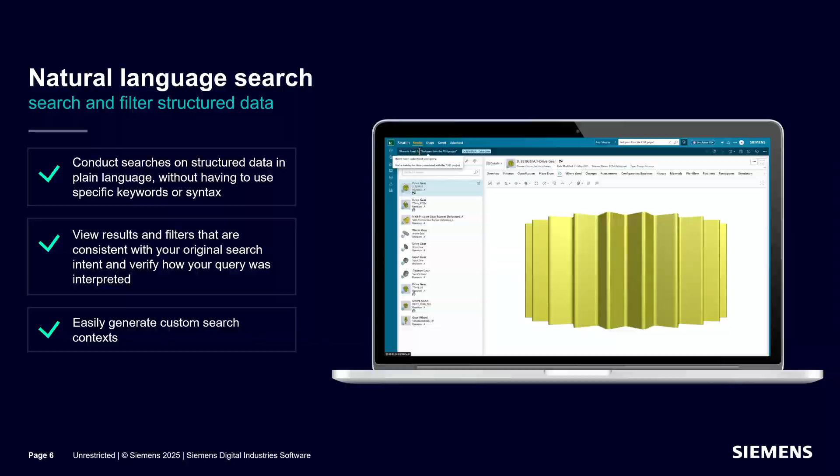We'll now go through the life cycle of a project that could be a product-oriented life cycle, or it could be a plant-oriented life cycle. And every project starts with project definition, and a nice and good project definition starts with reuse. You don't start from scratch, from the white blank. You start by reusing what you have.

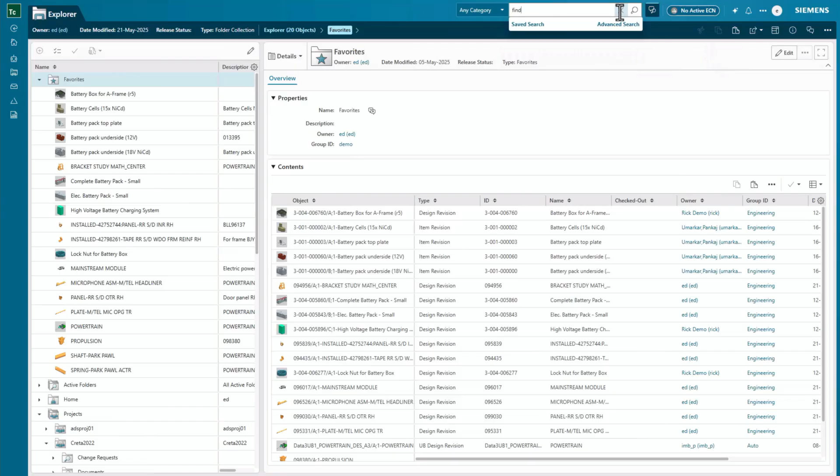And for a nice and good reuse process, information search and access is key. I wanted here to highlight one of the AI use cases we have, about how I talk in natural language to my engineering data backbone to search for information without knowing really what I'm looking for. And I can access all information, including the 3D.

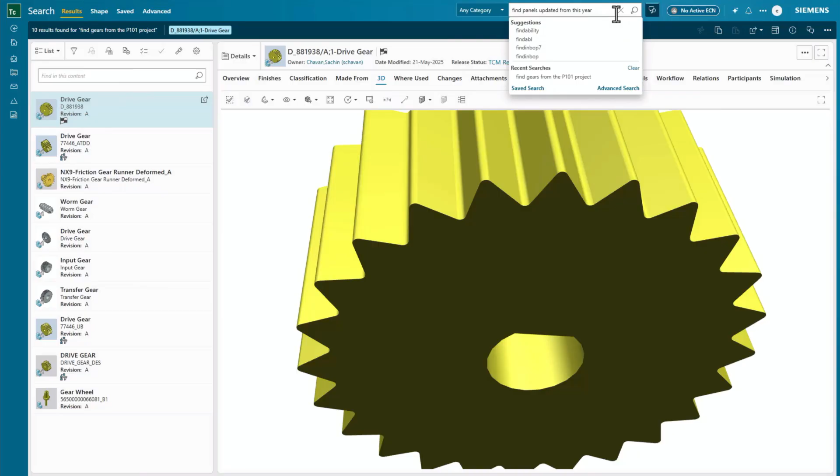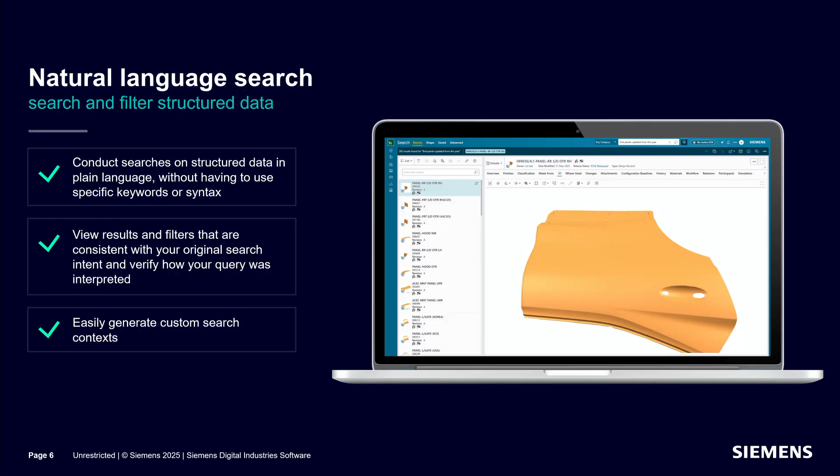But here, in that example, I knew the number of the project. It was project P101. But here, I don't know the code name. And I just ask for the panels updated this year. And so the intelligence knows where to find the panels done this year.

Then in the project lifecycle, you will start, after reusing what you can, to define a system approach, a system engineering workflow, starting with requirements. So we are providing tools to digitalize and move from a document-centric to a data-centric approach for requirement management using one unique agile platform, which is Polarion.

That platform is strongly integrated with an MBSE approach, including an MBSE modeling tool, to have that complete definition of a system and subsystem and provide you the basis of the traceability and the digital continuity through the design and the simulation.

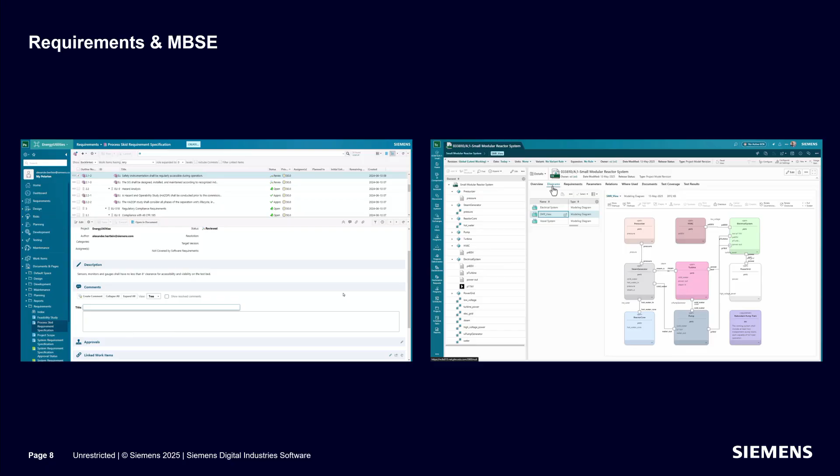The interesting part in becoming data-centric from document-centric is to put AI in your requirement activity. And here you can see that embedded in the tool, you will have capability to validate that a requirement is precise enough.

And it performs a similarity analysis to check with the other requirements that there is nothing too similar, and then a consistency checker to check if you didn't write something which is the opposite in the same document, to help you have a consistent and comprehensive requirement engineering process.

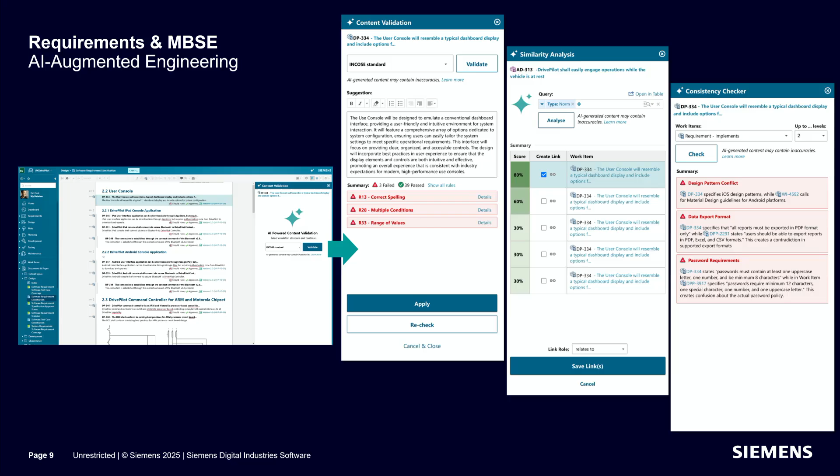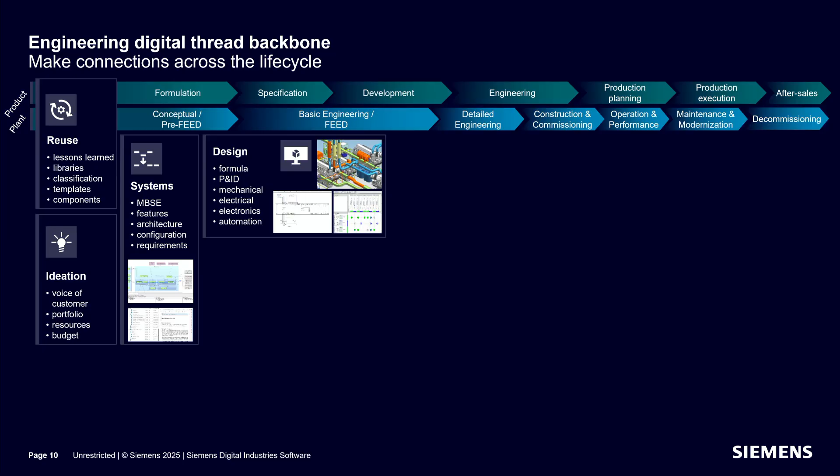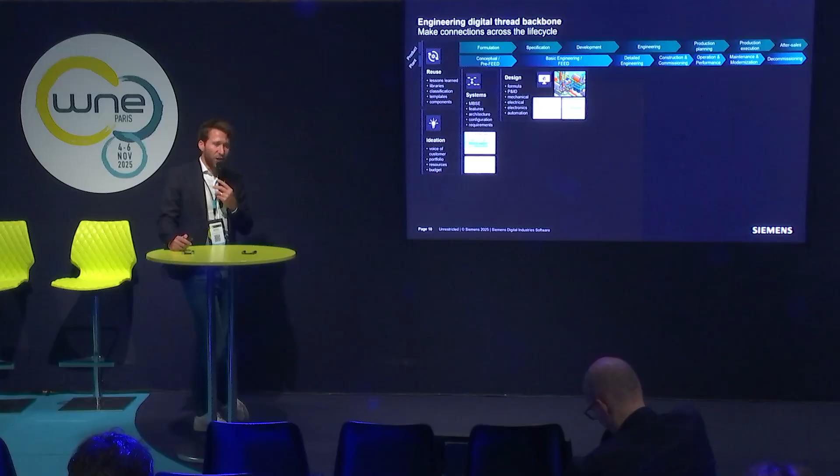Then, when you perform the system engineering activity, you will move, and it could be done in parallel of course, to a design phase, to design from a formula to automation, including P&ID, mechanical and electrical, sketch of the plant. Sorry. And we provide at Siemens an integrated tool chain in order to have strong integration between the P&ID, the electrical, the piping activity at a low level,

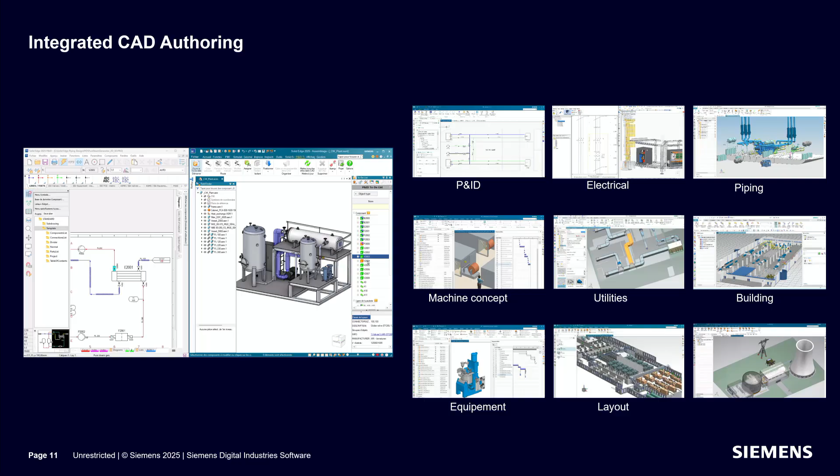and moving to the equipment definition, equipment concept, to actually define the layout of a factory, maybe a nuclear fuel factory, and at the end have the complete comprehensive mock-up of a nuclear power plant. And you can see on the left that tools are connected between 2D and 3D. This CAD model will then be used for the simulation activities to be performed in order to validate and optimize.

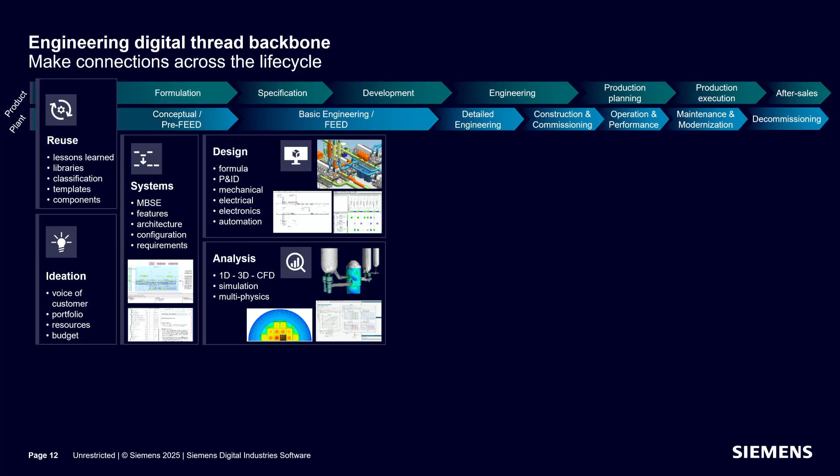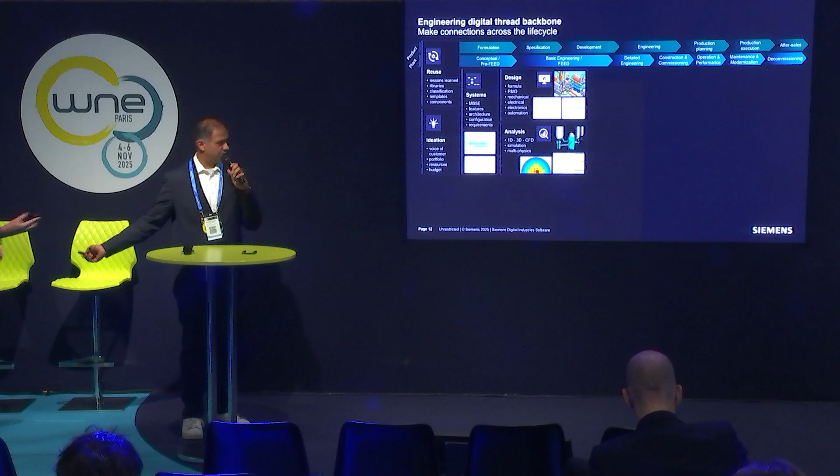Exactly. So thanks, Guillaume, for that. And just building on the term of reuse, we know that there is a lot of reuse, or rather over-design or maybe repetitions in the engineering processes. And the closer we can bring these tools, processes and tasks, the less we need to repeat them. So a lot of those workflows can be automated. And I'll just show you an example where we have done this with our tools.

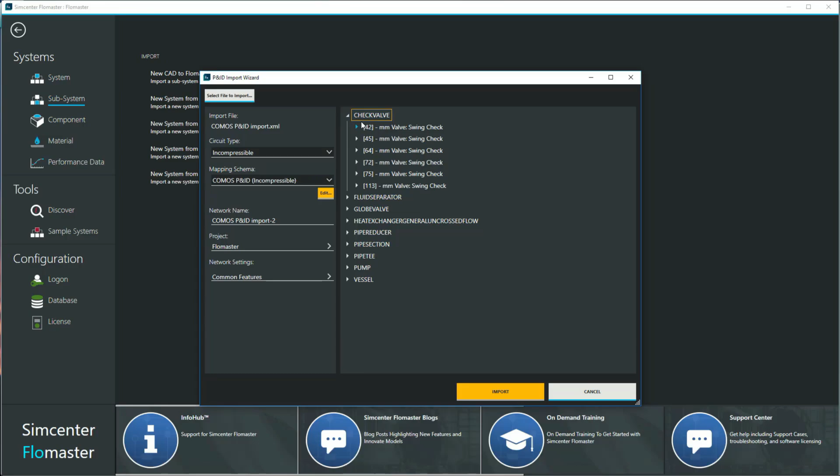So what we have here is basically a P&ID, and we have open APIs, and we can integrate any kind of third party. And that is very quickly converted into, let's say, a backend, which is an XML, and which can be quickly brought into the system and mapped to a physics-based model. So all the mathematical equations, let's say if you have n types of pumps, valves, all those curves are already populated in. So very quickly, you go from your design to your first validation of that design.

So things like procurement, what pumps to size, when to procure them, very complex equipment that has very long delivery cycles, can be really brought up front. And one of the proof points we have is we worked very closely with our customers in China. So this is something that the Shanghai Nuclear Corporation did with our tools. So basically, they pretty much automated the entire workflow from going from CAD all the way to CAE.

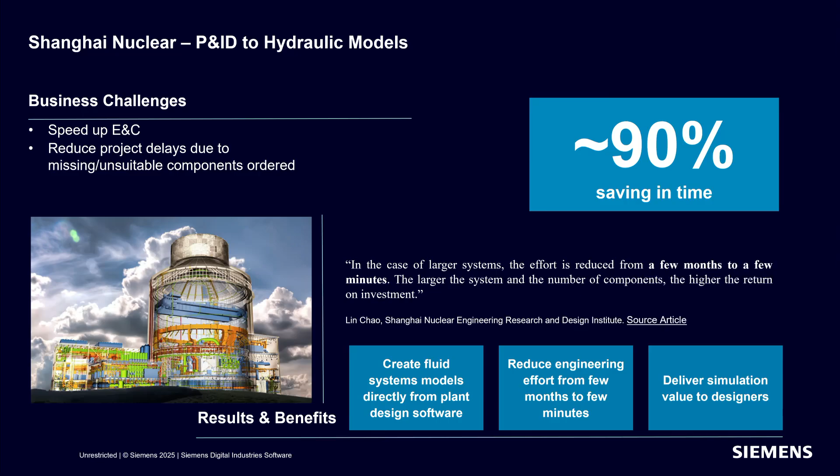And the bigger the model, and because we are talking really big systems in terms of fluid networks here, an engineer would sit down, design, put data in, there's manual errors. So all that heavy engineering man hours of approximately 6 months, 3 months, depends on how big the thing is, comes down to a few minutes. And it's very easy then to avoid any kind of manual errors. You can get validations done very quickly.

Building on that, it's not just one thing that we want to do in isolation, which is something unique about the company: we have a full range of things, and they all connect to each other, they all talk to each other. So it's possible that you already have certain processes and designs or tools that you've already used, possibly in-house, but all these dotted lines connect every aspect of your thing. So let's say if it's an actuator, the multi-physics side of that, to the reactor core technology, all the way from your classic PWRs to the fuel rods, any kind of advanced reactors, and I'll give some examples there later on. Everything around the reactor, the secondary.

And the main thing is it's not lost in R&D and engineering. A lot of these things enter into a digital dump. They're never reused. So reuse, the word is easy. How do we make it happen? It's really to operationally deploy them. They have to be easy. They have to be embedded. They have to be creating value for someone who needs them on demand, right there at the point of demand, within 5 minutes when they have to make an operational decision.

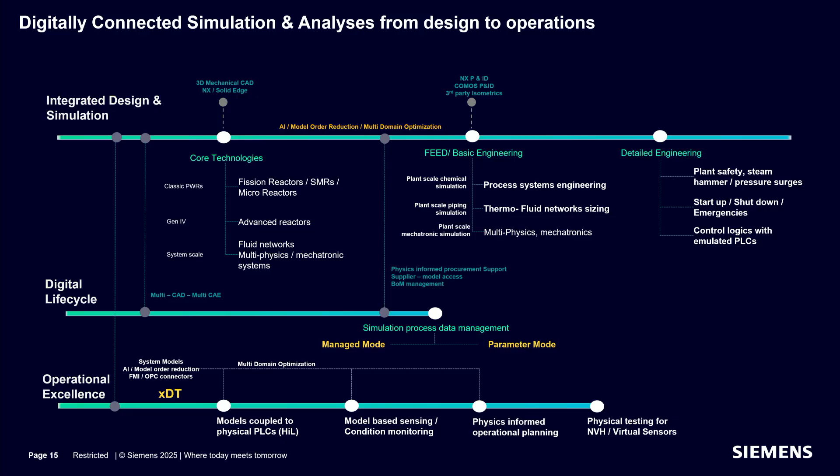So that's why we are working on a lot of AI technologies, as Guillaume was mentioning. And one of these is to actually abstract all of this complexity and put it into our little edge devices that can sit on the floor itself and deliver a lot of value. So one of the examples here is that pretty much all our codes comply with nuclear standards. One of the codes which is heavily used, especially for Gen 4 reactor licensing in the US, is STAR-CCM+, and one of our very strong customers, X-Energy, uses this code to validate their new design of the pebble bed reactor with the graphite and coated fuels.

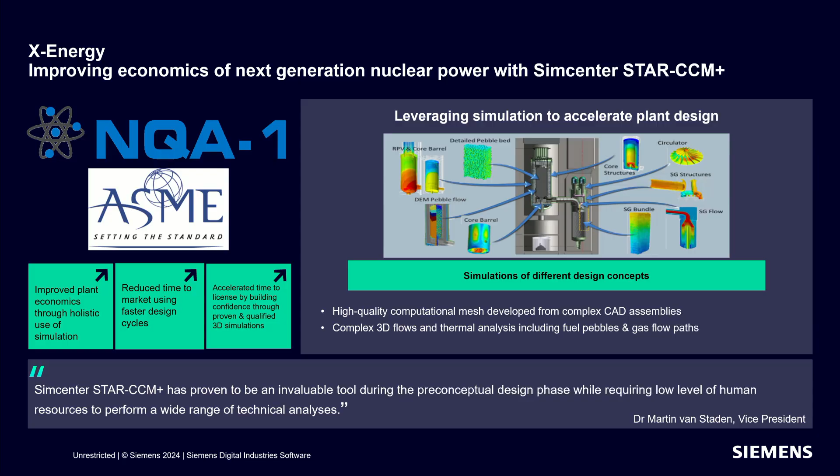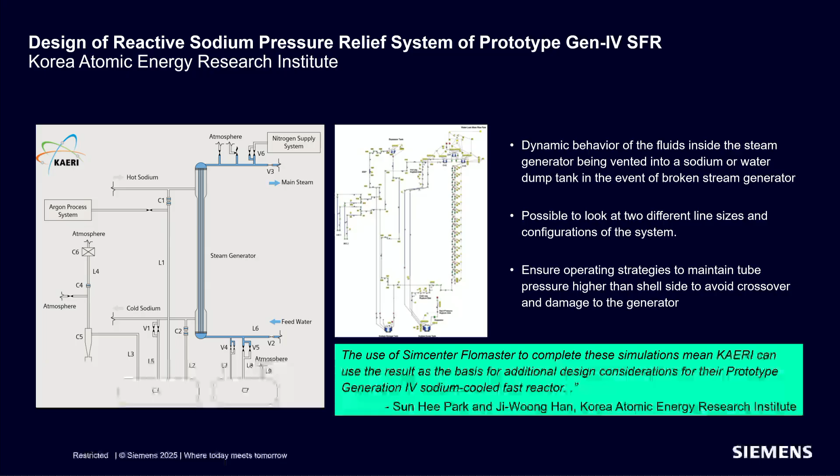The next one is for the sodium reactors, where you have an example here with the steam generators and some kind of flowback that needs to be assessed. This was done by Korea Atomic to assess whether there is any flowback or not, and make design changes accordingly. So there's a whole depth and breadth of simulation, but then that feeds back into a business process and connects to something that can be easily commercialized and makes the overall process leaner. Yeah.

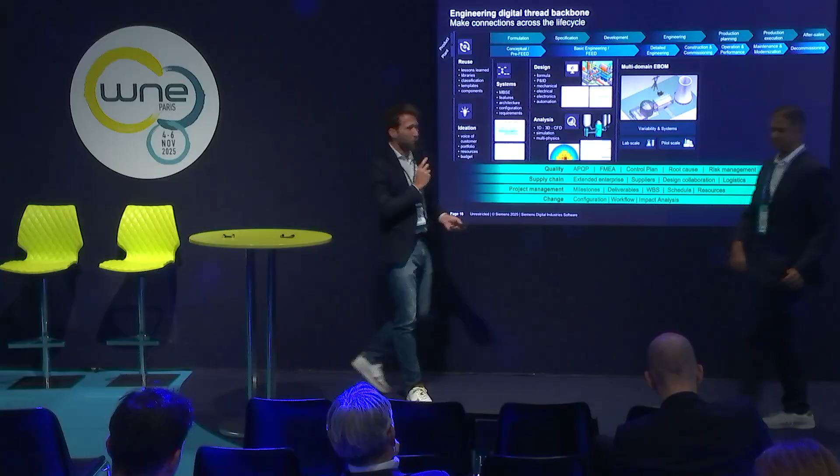We saw that we were at the beginning of the V cycle, the engineering workflows, and everything will move during the life cycle. You will have a lot of change. You need to have digital continuity from requirement through design, through simulation, and we provide the digital continuity with a backbone, which is a platform really accessible to everyone, and that will be the single source of truth and single point of access to engineering data. And that covers the link between design and analysis, but also transversal subjects like quality, supply chain, or project management. It's really where everyone will find the information. Could be documents, could be tags, could be 3D design, could be the risk, could be the issue. Everything is in that platform, and it's a simplified UI, and it's an accessible tool.

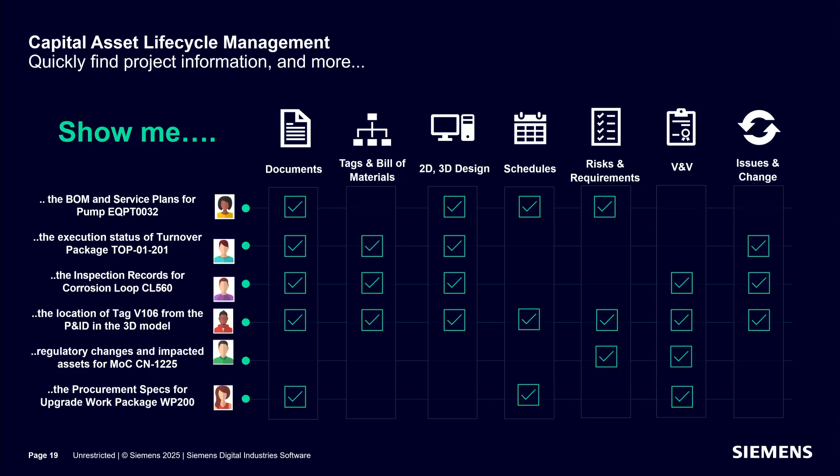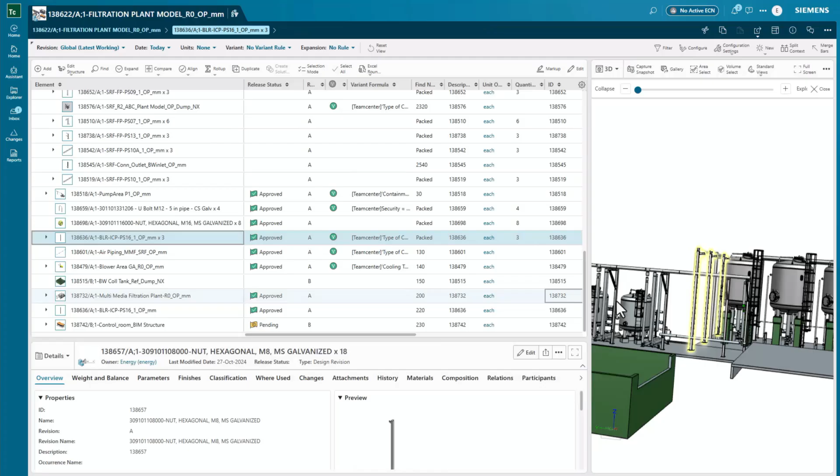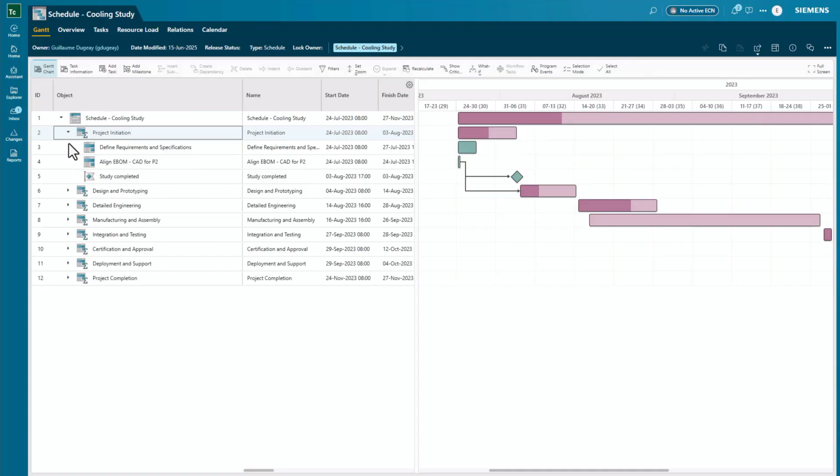Here is a quick example of that platform. You will have the full traceability of the system with a relationship browser to explore what are the requirements linked to a design. You can explore your PBS of the plant, verify what is validated, what are the variants, because in a modularization approach, you need to have this. You have an embedded powerful visualization tool to take measurements, to do clash analysis. You access, open and read documents in the platform to do markup, to collaborate with colleagues. You have inside the platform also the requirements. You have project management tools like a Gantt. Everything related to engineering is in one platform, a working platform, a standard out-of-the-box platform, which is Teamcenter.

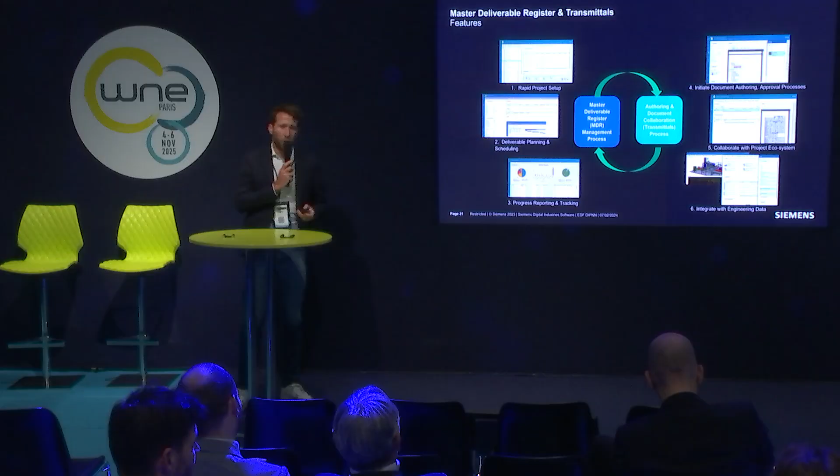You saw the Gantt and project management at the end. Something really, really important here is the document management. What we call it master deliverable register and transmittals: how I manage the documents and the transmittals with supplier, with customer, how I link that to the WBS, to the work packages, to the contract, to the credit. The platform is managing all of this integrated to the engineering workflows.

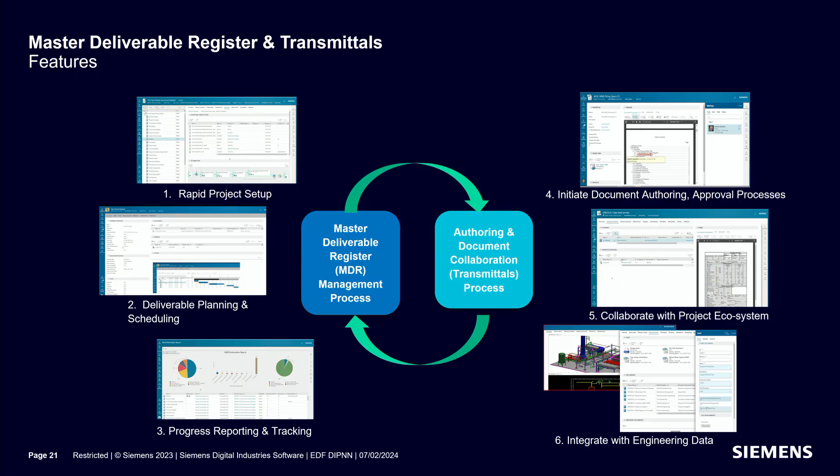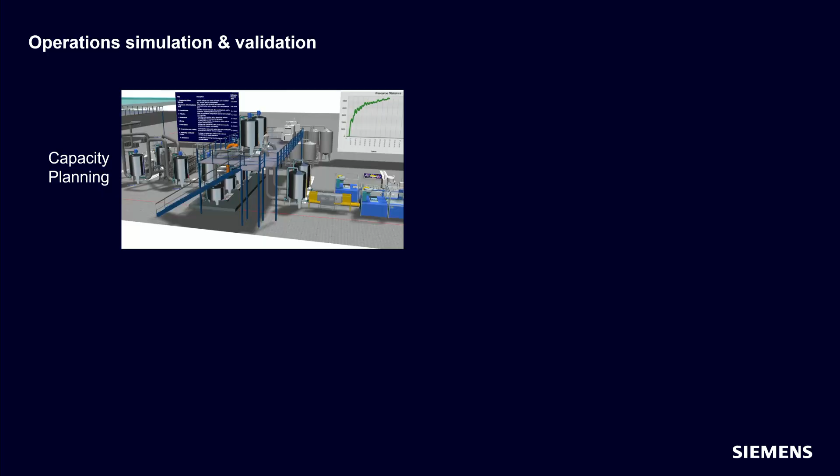We define what was the engineering, but from the start, from the requirement, we need to prepare what will be the construction and what will be the maintenance of the asset. And we can prepare that virtually with the digital twin. First, we can simulate the capacity of a layout. It will be especially relevant for nuclear fuel plant or nuclear fuel cycle to validate, considering a layout, considering operational capacity, the fact that you will be able to produce.

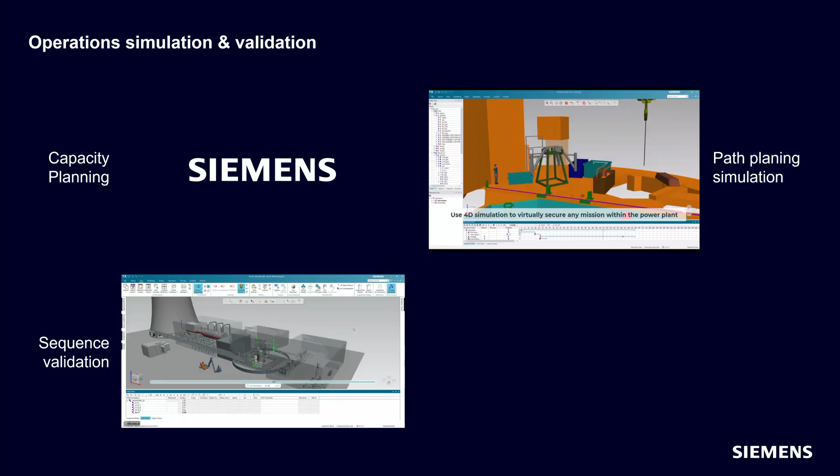Then you will be able to virtually simulate the path planning of a construction sequence and prevent and avoid issues on the field on dedicated construction phases. You will also be able to validate sequences. Here it's a decommissioning sequence, so to prepare what will be done as a 4D approach on a project. And then again, you can reuse everything you've done and prepared on the engineering side to train operators with immersive training solutions.

And the end of the loop of the life cycle is to redo it again, is to close the loop with continuous improvement and to reuse engineering data to supply and to perform during operation.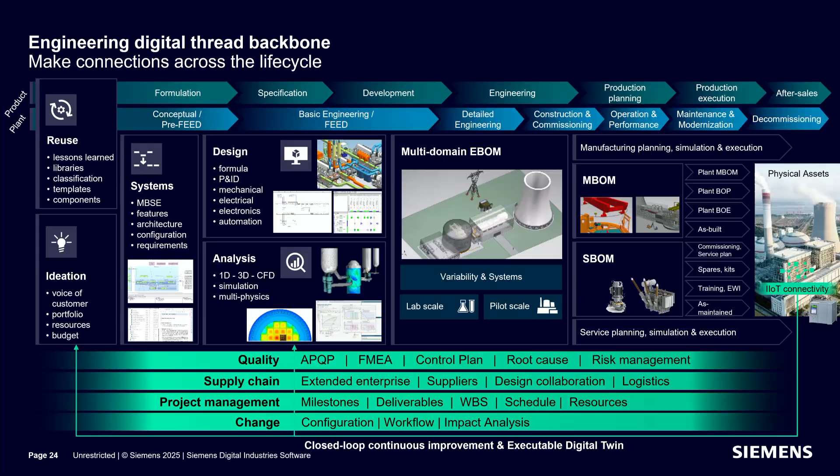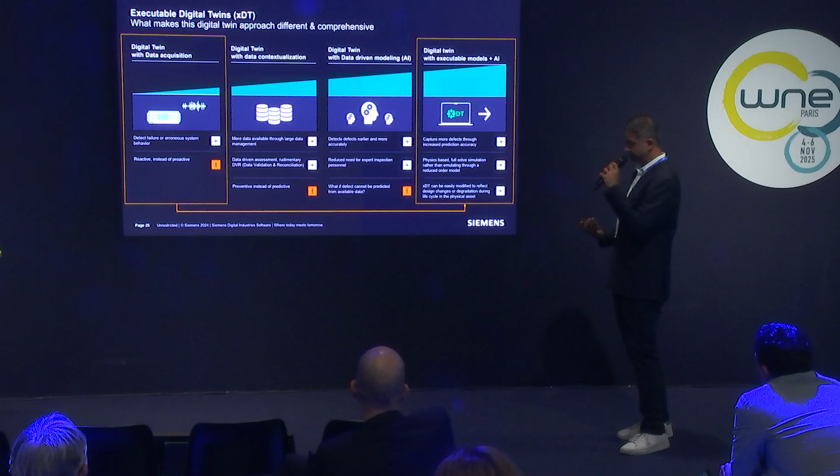All right. So when it comes to digital twins, there are different levels. The first wave, let's say, is more digitization. So you have an asset, you want to put a sensor on it, you want to measure certain things, vibrations, and so on. So the first level is an accurate state of the asset based on the instrumentation that you have. The second level would be, let's say, you have some data validation techniques to filter that, to have some reference on the context of that.

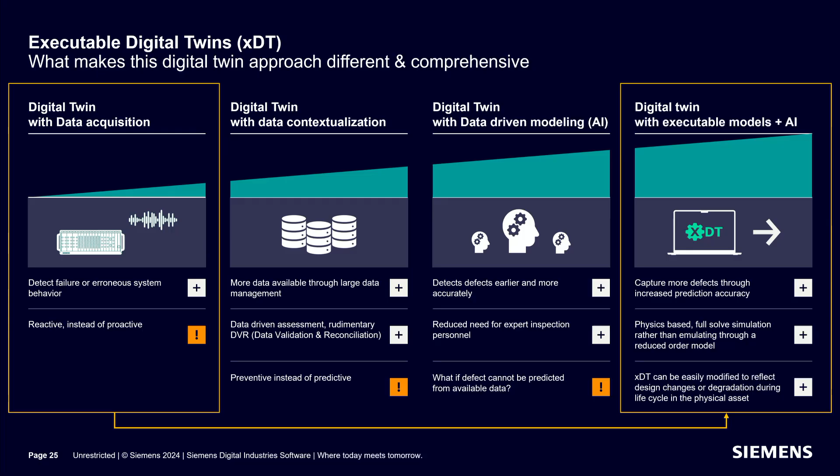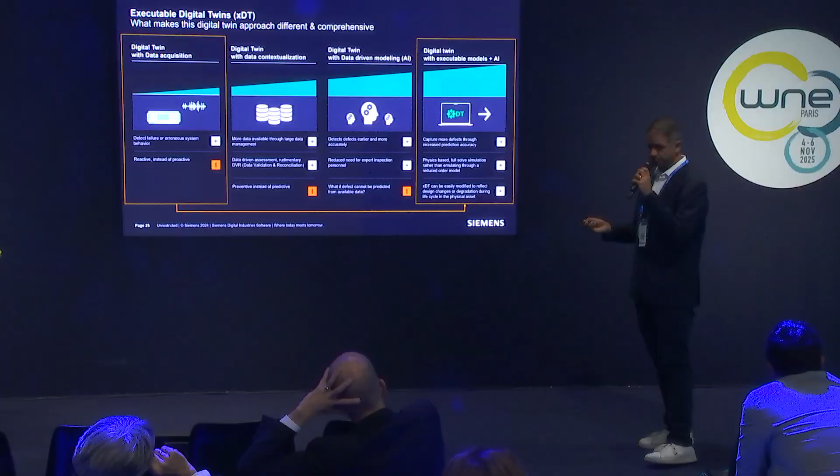And the third level we see now is a lot of AI being introduced into the mix, and it already is delivering a lot of benefits. We have recently acquired technologies from Altair, which have very specialized knowledge graphs built up, which can really help you leverage that kind of AI. And when it gets very complex or very comprehensive, we have technology called executable digital twin, which is basically taking all of that R&D work, extracting something that is away from the authoring tool, and can be hosted in any kind of environment outside of the authoring application.

So we're seeing a lot of examples on this. I don't know if some of you were there at the Siemens stand today. We had one of our colleagues at Framatome give a presentation on how they've been using some of our technologies to really help their operations out. This one example is a little bit generic, but it's a heat exchanger. It's something that is common throughout different industries.

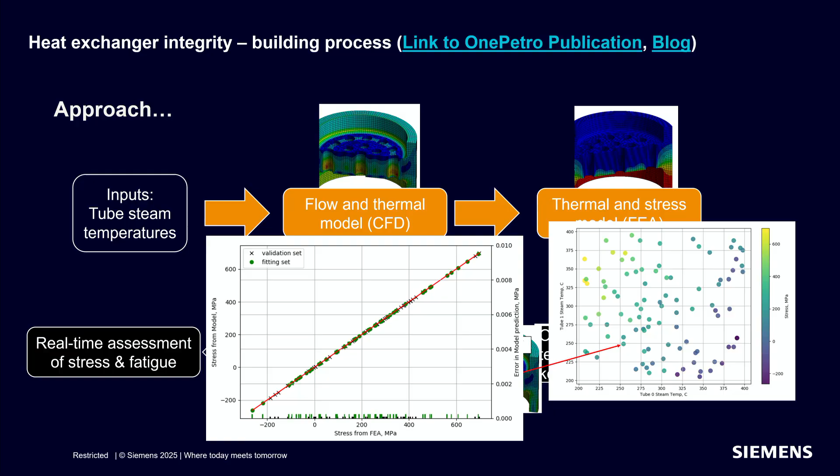So what we're trying to get to is an asset where you can only measure the inlet and outlet temperatures. How can you get something valuable, like remaining useful life? This is where we have extracted the detailed models from the 3D side, validated them with the test data that we have, and created reduced order models. And the beauty of it is that it's not just a cool thing to do.

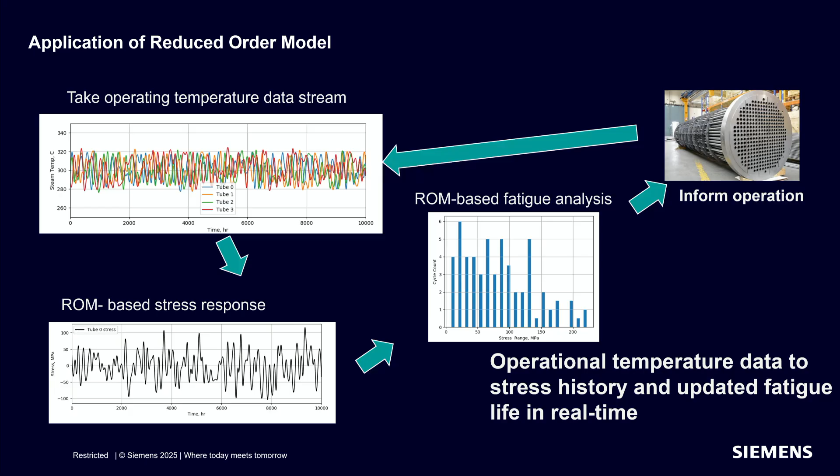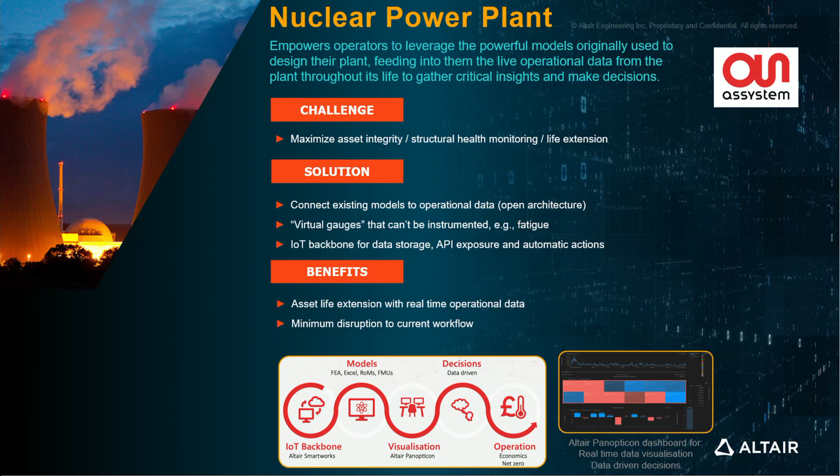As it goes through a thermal cycle based on the data, you get the stress response from this component. Based on that, you can see the fatigue it has accumulated, the remaining useful life, points of failure and so on. This has already been applied by one of our customers here. This is the Altair technology from Assystem, specifically in the UK, for getting all of this analysis into real time, into operations, to really augment the instrumentation we have.

And last but not least, we talked about jellyfish. I don't know if someone Googled up the jellyfish story.

Assets that are very close to sea typically do use seawater for cooling purposes. And not every time it's going through filtration or any kind of refining process to get those little fishes and algae out. And it's not just to get it out itself, but it's important to understand in these networks, there are zero flow zones. So wherever you have a stoppage of flow, basically you're operating in a point where you have no flow in certain zones. That's where little marine life starts to grow.

There's little algae, and if it really stays there for a long period of time, you've got a lovely little pipe with pretty much everything blocked, and everything has to be taken offline. 50 bar jets need to arrive, and they have to blow the thing out. So these things happen, and we had this example from BASF, which is in Antwerp. A very old facility has gone through a lot of retrofits, upgrades, and there's still a lot of instrumentation in the cooling and steam networks.

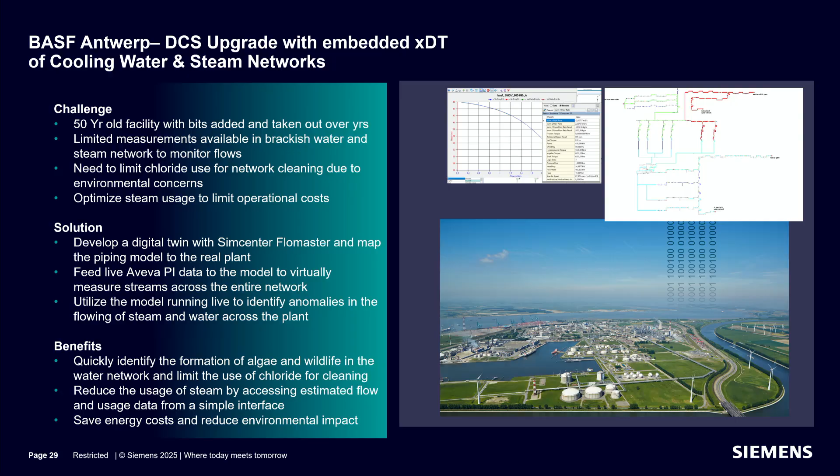But adding an instrumentation like a flow meter is expensive. Sometimes it's away from the DCS systems. You can't integrate that. So a lot of challenges to actually go and understand what's happening at scale across different scenarios. So they use the integrated approach with the executable digital twin, where they could actually have all of this information embedded in an AVEVA PI software front end, which is, we're very open to third parties, and in this case, wherever it makes sense with our customers, we work with them.

So let the story play out, but it's similar to the jellyfish entering. If you have a good idea of where your flows are exiting or getting things in from the sea, and that might change depending on the operation state you're on, these kind of things can be avoided. And so can be zero flow zones by augmenting the operations. So let the video play out as a testimony of this case.

I'm Katrien Stukers. I work at BASF Antwerp. 60 years ago, BASF, Badische Anilin- und Soda-Fabrik at that time, started a production site in the port of Antwerp. On the site, there are more than 50 producers and users of the BASF utility grid. And one of the most challenging grids is the brackish water grid. It is used here as cooling water. As it is brackish water, biocides are needed to kill biology that grows in it. But these biocides may not go back to the environment as it has environmental impact. And we must also be sure that when we dose it, it reaches all pipes.

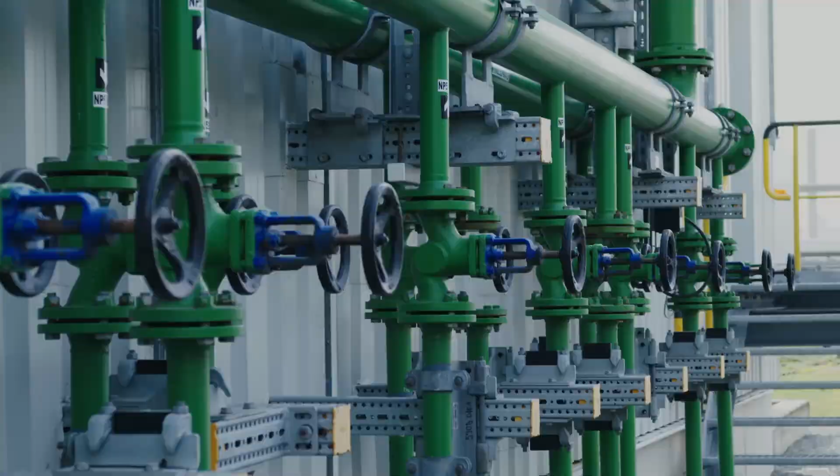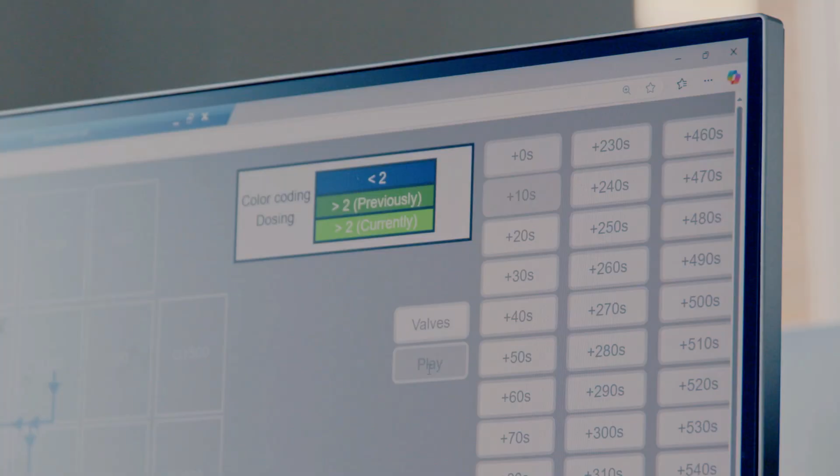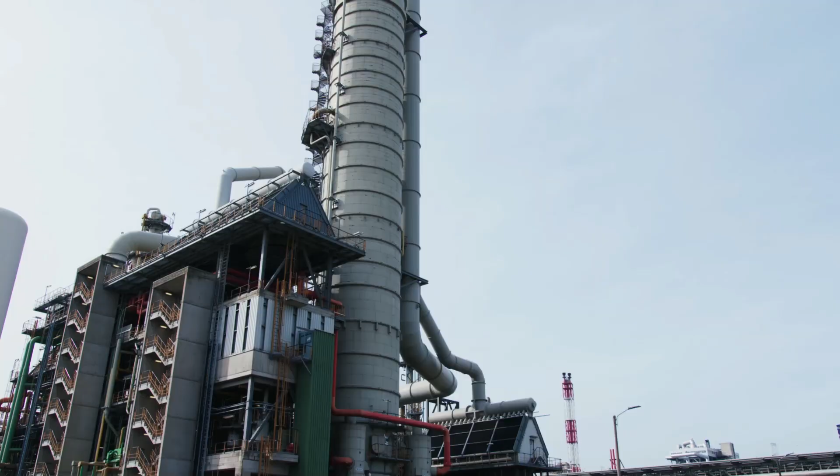An executable digital twin has a simulation or a test-based model at its core, packaged in a standalone format. It contains a physics-based behavioral model connected to a physical system in order to make calculations for flows, for pressures, for temperatures. And with these calculations, we can predict how changes would be. We can also analyze the current situation, and we can accordingly optimize the operations itself. For the automation, we didn't need to install any flow meters or pressure transmitters or other sensors, and the operators could quickly pick up the functionalities of Simcenter. As we have positive results, we'd like to extend the digital twin to other pressurized grids.

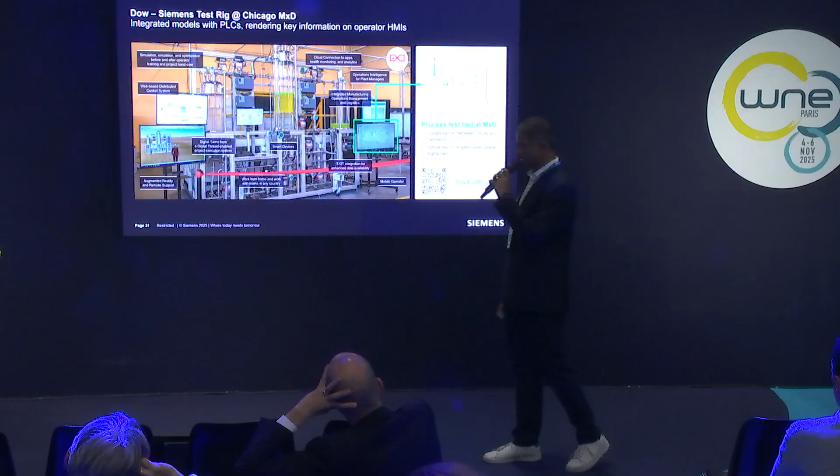Right. So that brings us to the end of our presentation. So we have this facility in Chicago in the US where you can pretty much see all the different Siemens hardware, software, XDTs, and that's something we've done in partnership with Dow Chemicals. There's also other things like robotics, even mechanical lungs, because this was developed during the time of COVID, automatically guided vehicles going around in a metaverse.